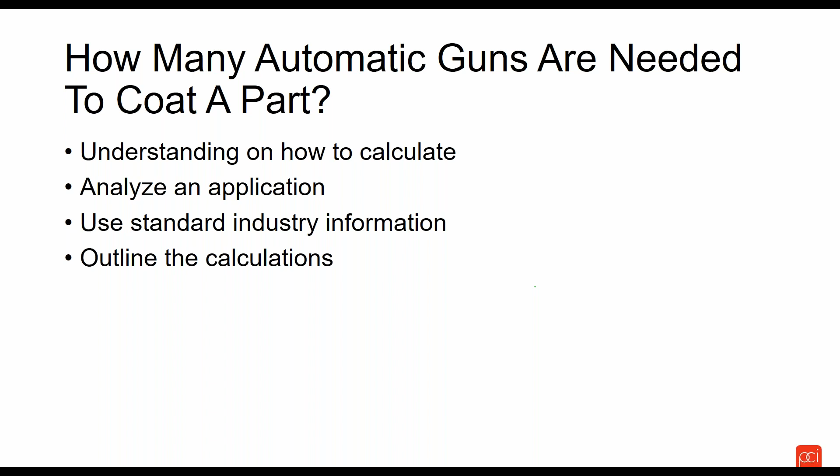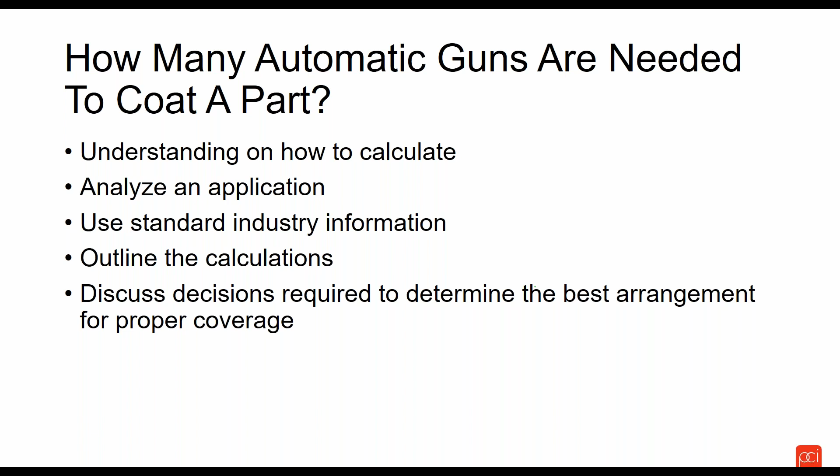We're going to use standard industry information that is available within our industry that all of us in the equipment business or in the powder coating business use from a standardization standpoint. We're going to outline the various calculations, and I'll point to some areas of where those calculations can be found in other publications for references. We're going to discuss some of the decisions required to determine the best arrangement for proper coverage. But all of that is really leading us to how do we calculate the number of automatic guns.

In this day and age where we have a lot of conversation about artificial intelligence, and supposedly artificial intelligence can determine so many things and make life easier, one of the things that I thought would be kind of interesting is, does today's AI really know how to calculate how many automatic guns are required to coat a part? What was interesting is I put the very question into ChatGPT: how many automatic guns does it take to powder coat a part? And I was kind of intrigued by the response.

Now, ChatGPT is more of a social artificial intelligence, so it doesn't really get into a lot of, at least from what I've been able to determine, a lot of the theoretical, real deep calculations. That's another level of AI that I think most people have to pay to subscribe to. But in this free version of artificial intelligence, I was pleased that it came up with the basic parameters that are required to calculate how many automatic guns are needed to be able to coat a part.

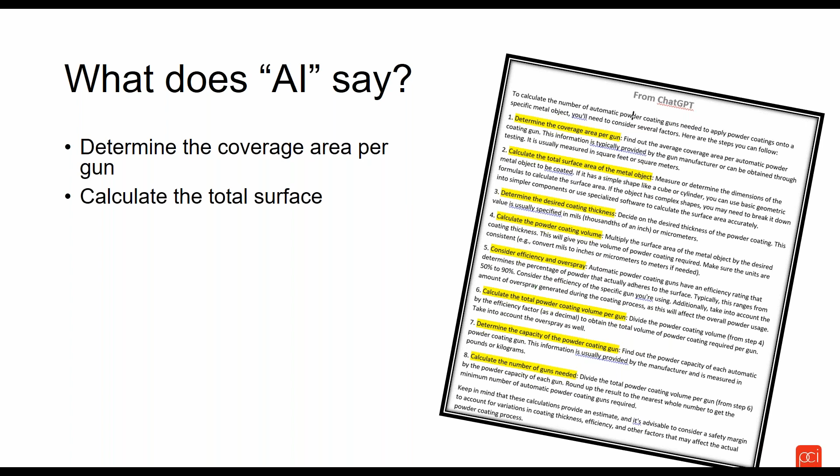I'll review some of those highlighted on the screen to the right. Determine the coverage area per gun - that seems pretty obvious. How much product are we having to cover? What are we trying to cover? What's that total surface area? How do we calculate that? It gives you some references in the general description there.

We also have to know how thick we want the coating. AI is at least smart enough to know that for us to determine how much powder we need to put on, we want to know how thick it really needs to be. What's our performance requirement is really what AI is asking us - what do you need to get a good quality product?

It knows that we're going to need to calculate, based on some of these previous bullet points, some volume of powder that has to be sprayed, or calculate the total volume to be used. It also knows that powder coating is not 100% efficient, so there is some inefficiency in the process and thus some overspray, which has to be factored into the calculation as well. Ultimately we're going to come up with a total volume per gun, and we're going to determine - or have provided to us - some capacity that our powder coating gun can actually produce. Out of that total volume divided by the gun capacity, we should be able to determine the number of guns. Even as generic as that description is on the screen, that is in fact how we are going to process how many automatic guns it takes to coat a part.

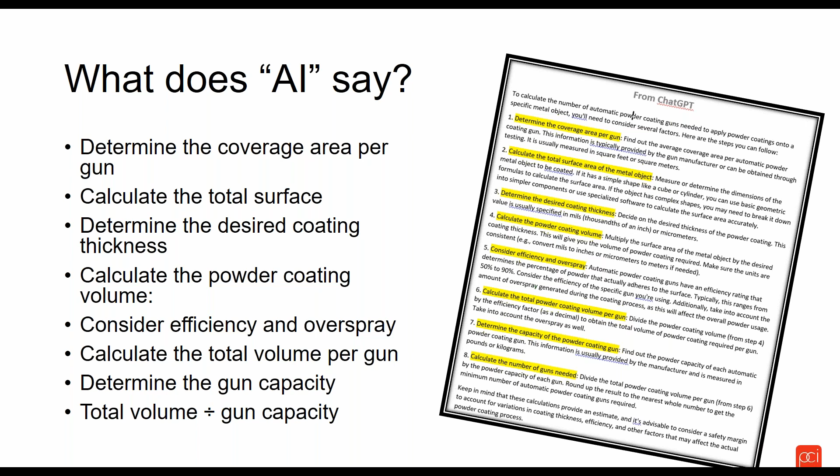So taking what is a general sense from artificial intelligence, let's go to a more industry known resource - the Powder Coating Institute. The presentation you have today is largely laid out in the Powder Coating Handbook, 5th edition, more specifically in chapter 10. If you're familiar with this book, or looking for a resource to refer to, I'd highly recommend obtaining a copy through PCI, the Powder Coating Handbook, 5th edition. Turn to chapter 10 and you'll see these formulas we're talking about, and the process of calculating the number of guns laid out in one of the sections.

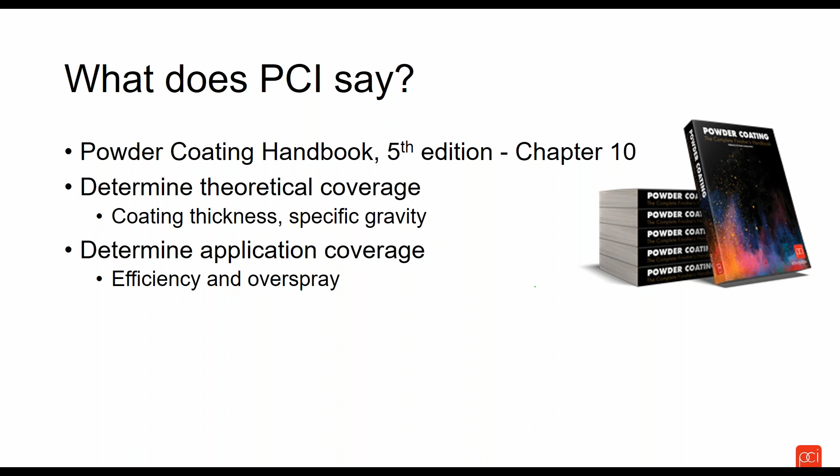In general, we're going to evaluate a theoretical coverage - determining what this theoretical coverage is that powder will cover. It's going to take into account the coating thickness and even specific gravity - we'll talk about that in a bit. We are then going to determine the application coverage, so we're going to factor in this efficiency and overspray mentioned in the AI example previously. We'll have to determine some sort of production rate - how much metal are we actually coating, and how fast do we need to coat this product? All of that is important for us to determine the correct number of automatic application equipment needed to properly powder coat a product.

We will need to know the capacity of a typical powder gun. Even in the 5th edition of the Powder Coating Handbook, we give a range that the industry uses, and that's a helpful guideline to follow as well. Ultimately, we're going to take our production rate and divide it by these other items we've calculated - application coverage and gun output - and all of that will be factored in to determine the number of guns required to powder coat a particular product.

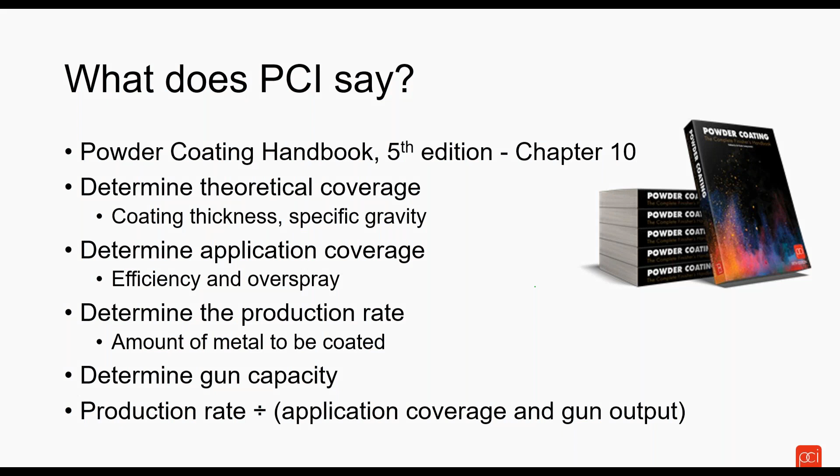PCI lays out all of these formulas in their book, so we thought we would take this webinar and put it into a more condensed presentation that would allow you to calculate this, if that was something you were desiring to do.

So let's dig a little bit deeper. Let's talk about some of these different areas. The first thing, as we mentioned, you need to know is the total production required. We're going to need to know the coating requirements - how thick does it need to be?

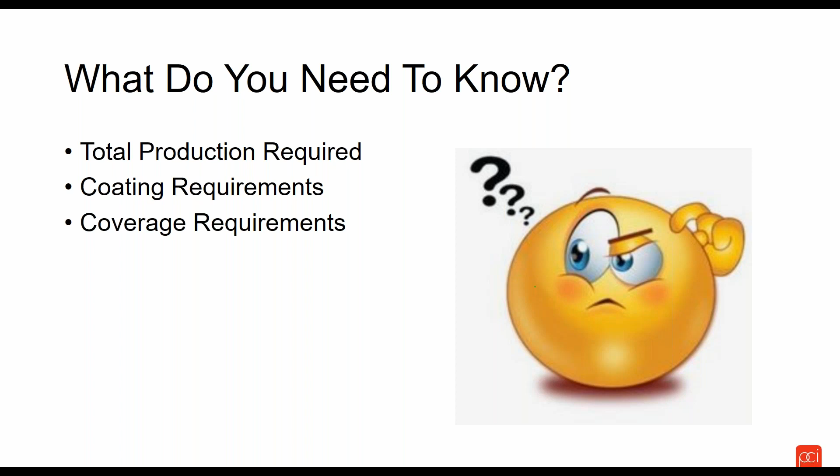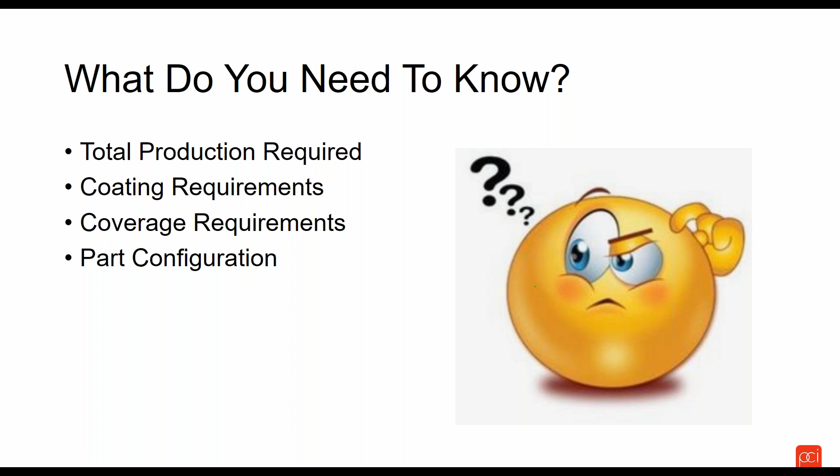There's a number of different aspects about the coating requirements. We'll review those shortly. We're going to need to know what is coverage, where are we looking for coverage, and what is the configuration of the part. We really need to understand what types of products we are coating. Let's look at these a little bit deeper one at a time.

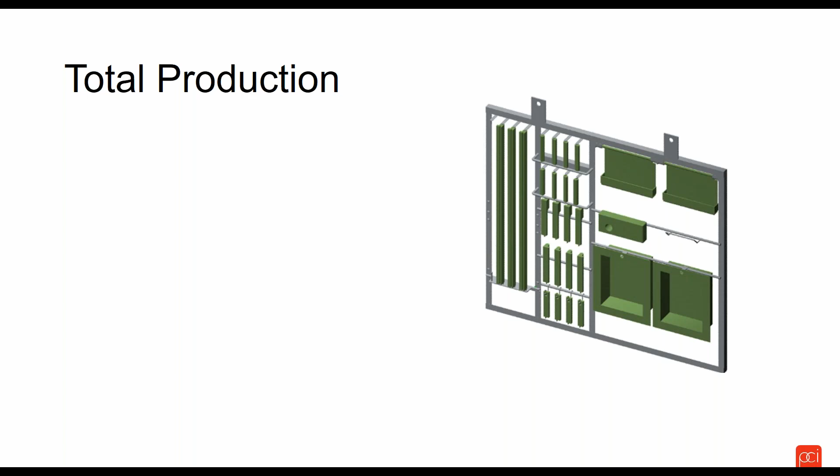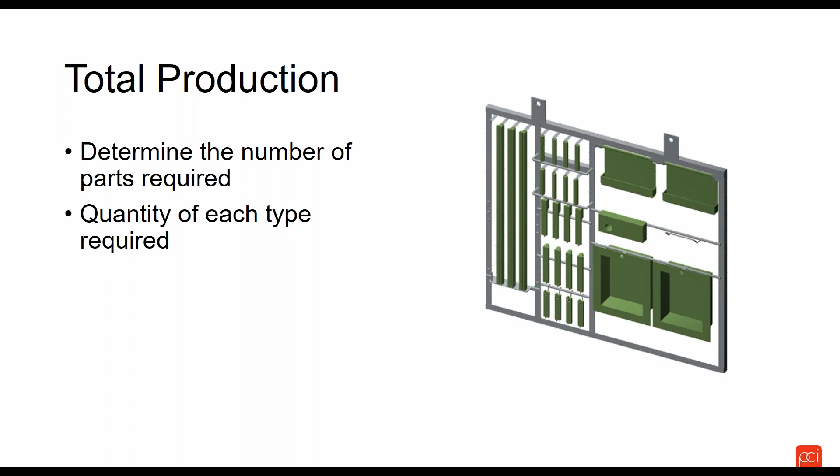That's certainly one way for us to look at how many automatic guns. You may have a particular need where you want to evaluate this for one specific component that maybe is hanging on the line, rather than a whole fixture. Whatever the arrangement of the product is, we do need to understand what are the number of parts required for us to process through this powder coating process line or booth where we have the automatic guns. We need to understand what it is we're coating, what's the number of them, what's the quantity required, to get a very good assessment.

What's the hanger and line spacing? If we understand each of these, we can begin to build a good hanging fixture or look at evaluating line density to improve that. Because line density and hanger spacing will help us improve our overall transfer efficiency. We'll discuss transfer efficiency a little later, but obviously the more dense the line with product, the more metal we coat, and the more efficient we can be in reducing overspray and recycling that material, or spraying to waste in some examples. But we want to be as efficient as possible. So maximizing our hanging, spacing, and line density is critical to getting the most out of whatever the number of guns are. But ultimately, we're going to determine some maximum part size.

That might be the maximum height. So let me use some of my drawing tools here. Give me just a second. We'll stay with the arrow. So I might look at my maximum part size from here to here. We're looking at this distance as my maximum part width, and likewise part height, and from here over to the right side, that would be along the conveyor. And if we had any depth, depth across the conveyor would be another way. But ultimately we're trying to determine what is the maximum product size that's going through.

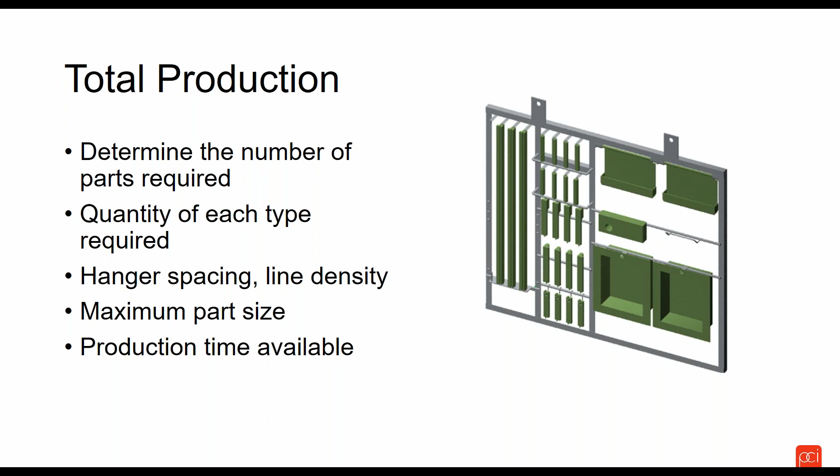What is our production time that's available? From that production time, we can ultimately determine some sort of production in terms of square footage per hour, per minute, per year. We can determine what is the amount of material that we need to process in a given period of time. That takes care of the production requirements.

From a coating requirement standpoint, we need to have a good understanding of how thick do we need it. Are there primary surfaces that we're concerned about where maybe the thickness is most critical, and where we want to ensure we achieve maybe 3 mils or we have a 4 mil target? And maybe there are some secondary surfaces, maybe on the backside or a hidden area where we're not as concerned with the thickness, but we are looking at the amount of powder that needs to be applied on these secondary surfaces. So understanding where the thicknesses are and coming up with some sort of overall average for the part is helpful. So coating thickness is important.

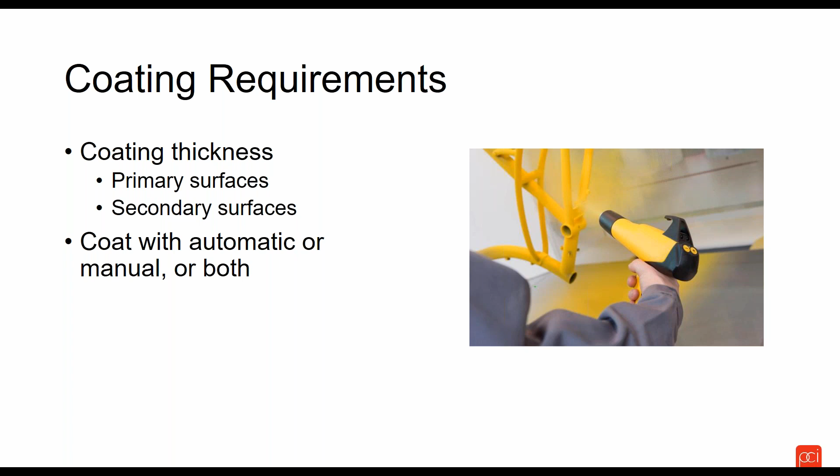Do we need to coat this automatically or manually, or will we be doing both? For the sake of our webinar, we're going to consider coating this automatically. However, depending upon the complexity or the geometry, there may be some surfaces that still require some touch-up to be able to get the required thickness or coverage we're looking for. Either doing that with manual, or even a secondary consideration of putting in some dedicated fixed applicators to target certain regions. But in general, what we're looking at in this particular case is what is the basic number of automatic guns required to coat the product passing down the conveyorized production line.

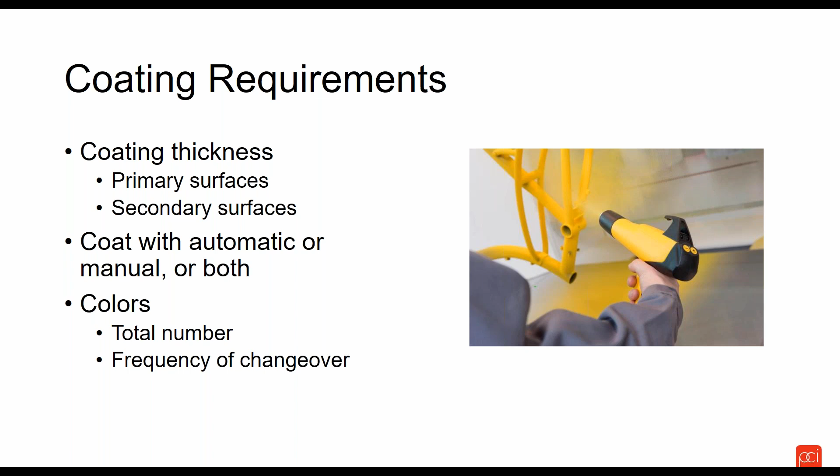We also may have a need to understand the total number of colors and/or frequency of changeover. That doesn't necessarily have as much to do with the number of guns, but it's important information from a coating requirement, just to have as an awareness if we're gathering data. From a coverage standpoint, how much has to be covered?

Is it based on the part style? Is there a particular rack or hanger arrangement we're concerned with? How are we hanging these? Where are the critical areas of concern? Are there areas requiring less or more coverage? What's the coating thickness? Those are all things in terms of understanding the coating and coverage requirements.

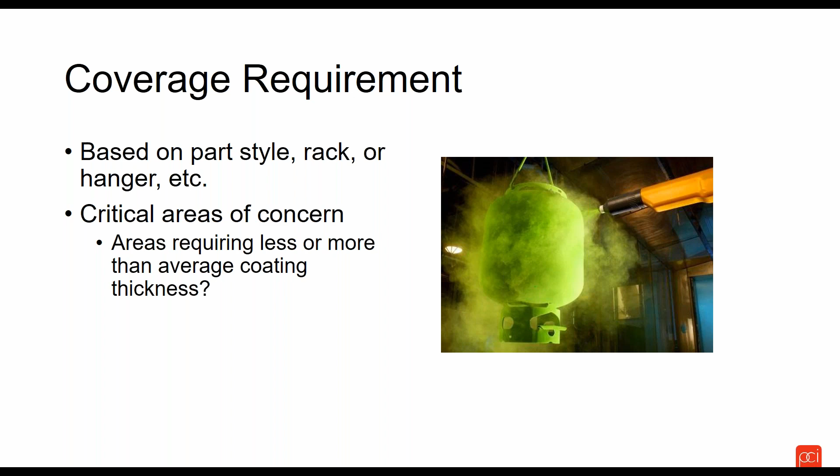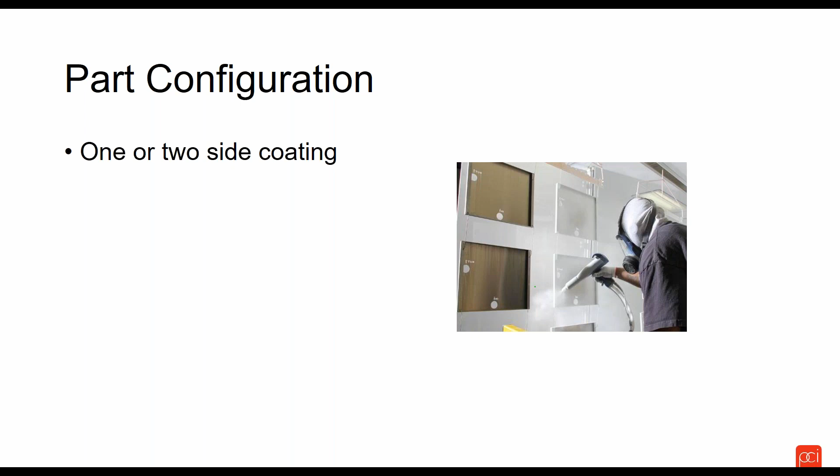Secondly is the configuration. Are we doing one-sided or two-sided coating? Are there areas we need to focus on for performance characteristics, corrosion protection, or is it just making sure some areas are covered even though they're not as critical from a decorative standpoint?

Will it be single hung or multiple parts hung back to back? We can improve efficiency by hanging multiple parts, but depending upon the arrangement, that can begin to mask certain areas. So we need to be aware of our hanging arrangement and part configuration. That's important in terms of an analysis.

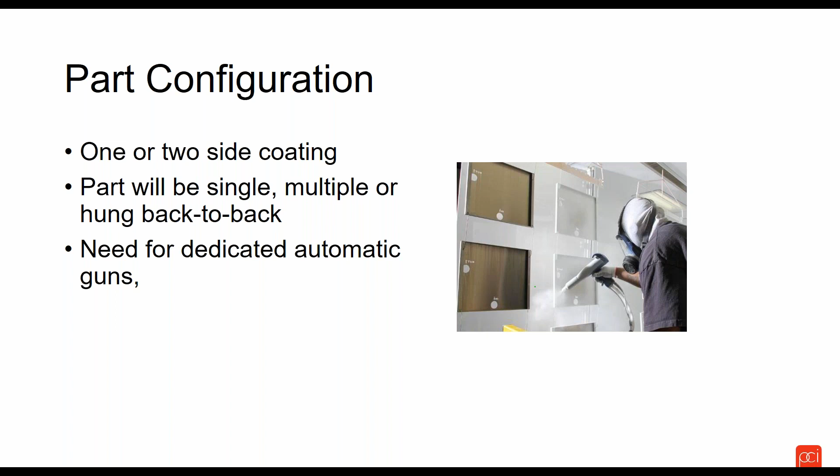And if there's potentially a need for either manual touch-up or some dedicated automatic guns for reducing manual labor that might be required. A lot of companies will typically put automatic guns in and then use some sort of manual touch-up, either pre or post, as a way to fill in areas that may need additional attention.

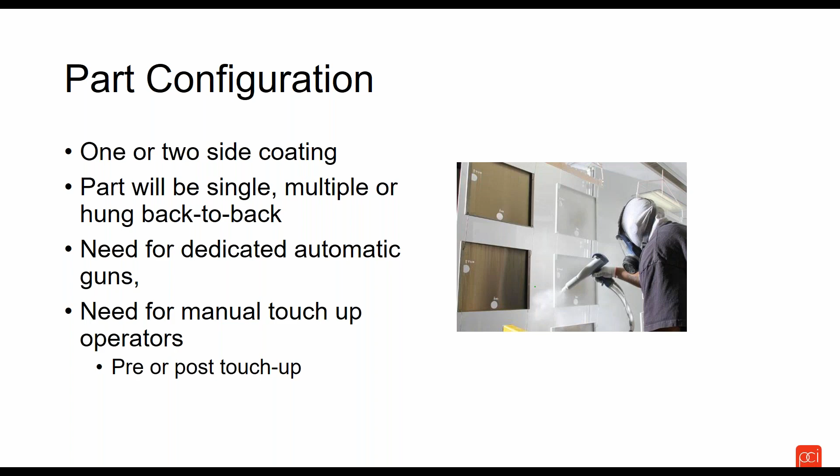So with all that being considered, if we have some good understanding of those four critical areas, we can begin to get a better understanding of how many guns are needed to coat a product.

I was kind of having fun with this. It's like answering the question, how much wood could a woodchuck chuck if a woodchuck could chuck wood? It's kind of like, how many powder guns does it take to coat this product? So in general, we're going to try and answer that question. Let's just dive right in and begin.

One of the first things we need to understand is what is theoretical coverage. We need to understand how far a pound of powder will go. It's kind of like, what's our average gasoline mileage per gallon for the car we drive? What's the theoretical mileage of that engine, right?

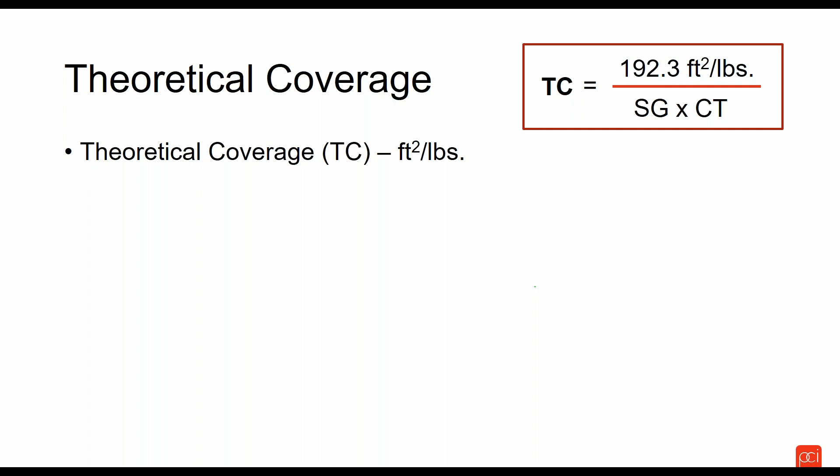In this particular case, we have a formula you see up in the corner. Theoretical coverage is the amount of square footage per pound of powder. How much metal can a pound of powder cover? One of the key things we want to do is factor in specific gravity.

But before I get into that, the question is, where does 192.3 come from? That is an industry universal powder constant. That is what the industry recognizes, that a pound of powder will cover 192.3 square feet, but that's based upon a specific gravity of 1, a coating thickness of 1, and an efficiency of 100%.

Now, those of you coming from the liquid side of the business may recognize that a gallon of paint will cover so many square feet of metal. It's a similar kind of constant we have in the powder coating world, and that's why I've highlighted it in red. That's our industry standard used throughout the industry.

Generally, all the powders you buy don't have a specific gravity of 1. They're generally heavier, or have a higher number. And the cured thickness is usually greater than 1, probably 2, 3, maybe 4 mils in some applications, or more. And obviously, as I mentioned, we're not 100% efficient, so we have to factor in efficiency at some point.

Our theoretical coverage is going to take into account the industry constant, and we're going to factor it down for the specific gravity. Where do I get that? The specific gravity is provided by the powder coating manufacturer, and it's usually found on their technical data sheet, the TDS. You'll find the typical range of powders for specific gravity is from 1.1 to 1.8.

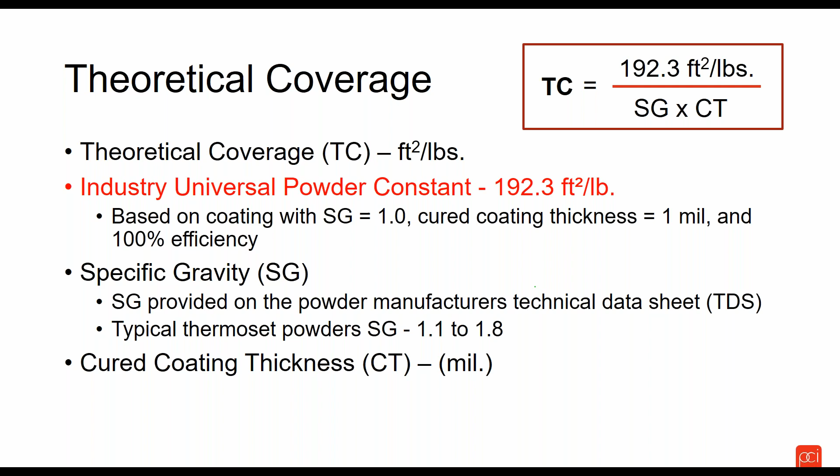But we do factor that into this, as well as the coating thickness. We'll come down to an example a little later where we'll see some of these, but in essence, this helps us understand what is the theoretical coverage of the particular powder you are evaluating in this scenario. And so then we factor in the efficiency.

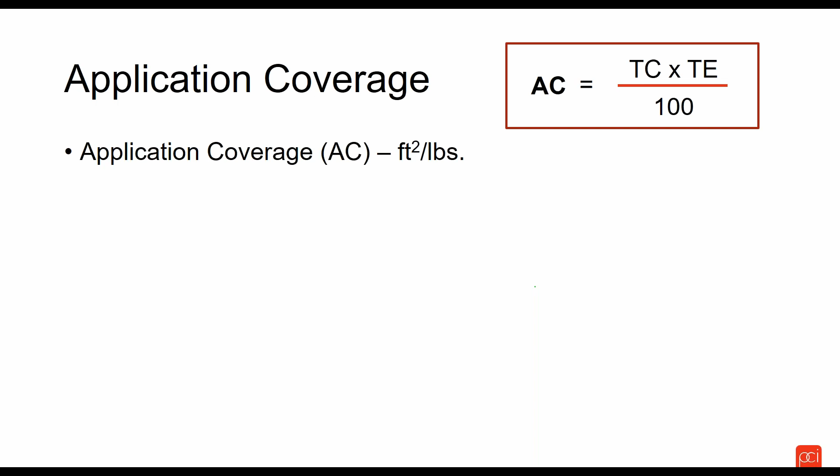Application coverage is the theoretical coverage, TC, factoring in the transfer efficiency. So application coverage again is square feet per pound, but really it's factoring the efficiency of the process. If you want to learn a little more about transfer efficiency, again I'd refer you back to the powder coating handbook.

There's also, although it's for a lab environment, it helps in the back of the powder coating handbook - I think it's Tech Brief number 10, on page 330. There's an example of how you can calculate transfer efficiency. That's based on a laboratory environment, but it does help you to better understand what's involved.

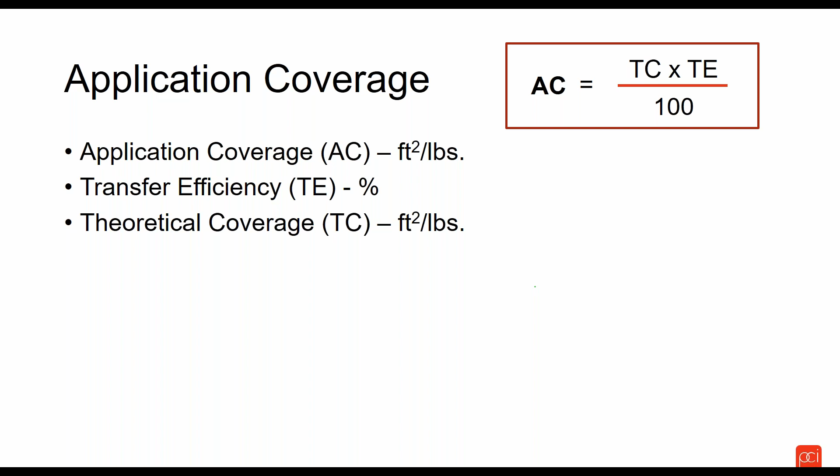Transfer efficiency is really nothing more than the amount of material applied to the product in a given period of time versus the amount of powder that was sprayed in that same period of time. So the more we apply to the product, the more efficient the process is. Theoretical coverage is again the previous formula we calculated, and this helps us understand how these two dovetail together. So let's keep going.

We now have a better understanding of how much a pound of powder will cover, so we also need to look at our production rate. Our production rate is basically the amount of square footage of material we plan to process on this conveyor line, generally thought about in terms of square feet per hour or square feet per minute. In this particular example, it would be square feet per hour.

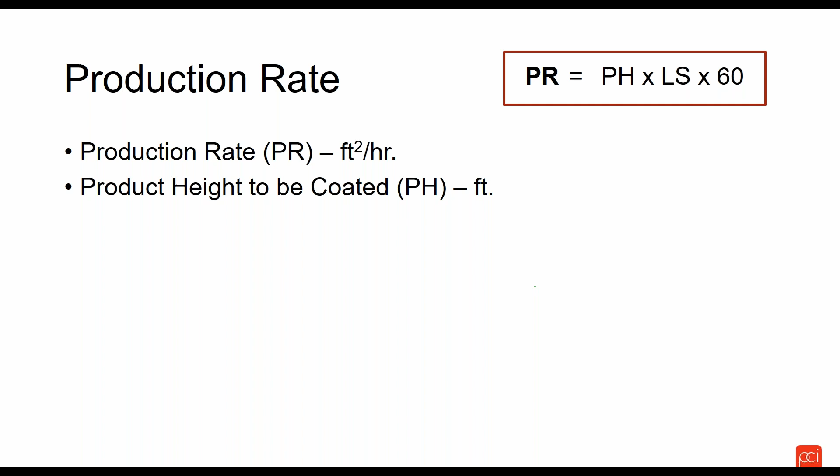The product height to be coated is the maximum height of the product going through our conveyorized line - how many feet high is this. Our production rate takes into account the line speed of the conveyor, and in this case we will take the product height times the line speed.

We've really simplified our square foot calculation, because automatic guns spraying in a booth are looking at a wall of product coming by at a particular speed - that's our conveyor speed. So it's a simple calculation: product height times the line speed, and the 60 is our unit conversion to make the hours and minutes work out.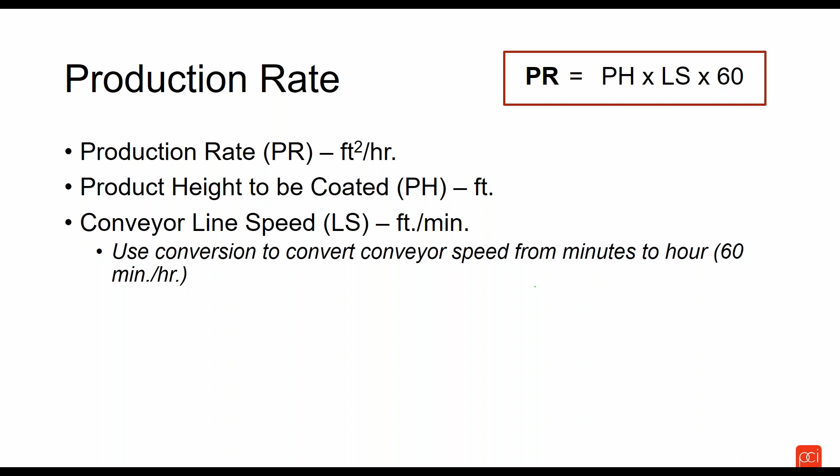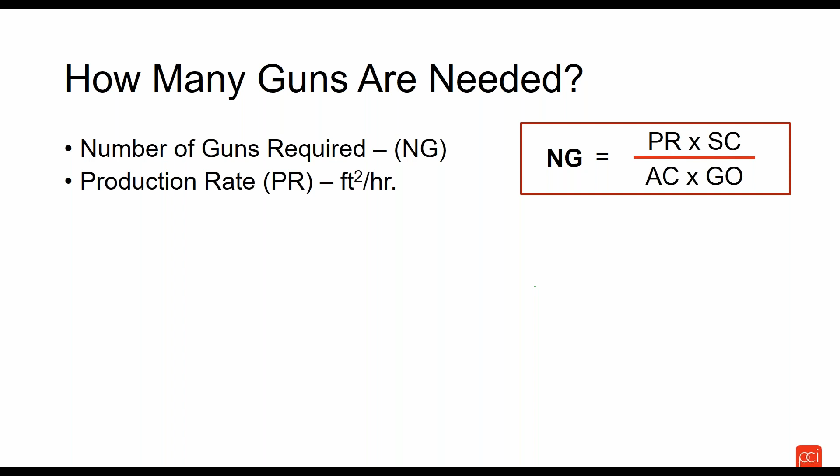Our production rate then would be a number that we use. So the question is, how many guns are needed? The number of guns we'd use in our calculations would be NG, the number of guns required. To do that, we're going to take the formula you see on the right side of your screen.

We're going to look at the production rate in square feet per hour, and the application coverage, which is our overall applied efficiency in square feet per pound. We'll factor in the number of sides coated - whether we want to evaluate application from only one side of the part, or look at it as a total, considering both sides of the product.

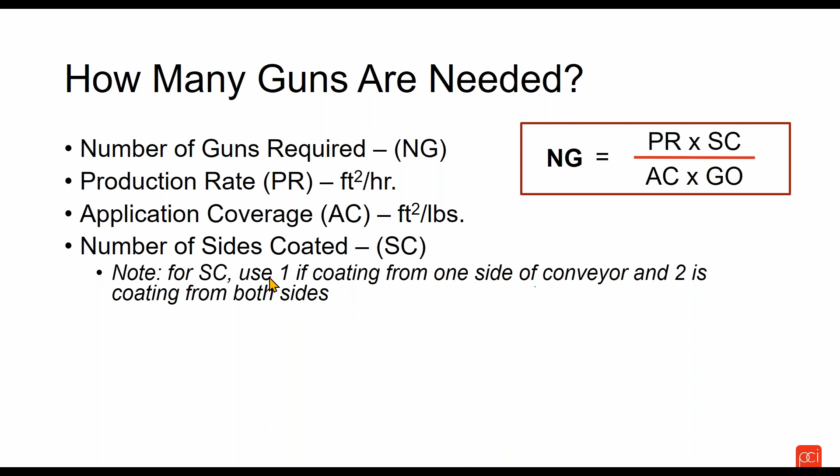So it does make a difference which number you use, but you're only going to use 1 or 2 - one side or two sides coating in the SC category here. And then we're also going to put in the amount of powder that we think is coming out of our guns. Now, this can actually be measured.

If you're looking for information about how to do that, I would talk with your equipment supplier. That's a very simple and easy way to calculate the amount of material that is coming out of your spray gun per minute or per hour, however you choose to evaluate that.

In the powder coating handbook, we give you a working range that typically is between 19 to 29 pounds per hour. For those of you working in metric, that would be a range of roughly 145 grams per minute to 220 grams a minute. So depending upon what type of units you like to work with, those are the typical ranges that most manufacturers are trying to drive or use their equipment in.

And I'll say this as an example: this does not mean that the maximum amount of powder that can come out of a powder gun is 29 pounds per hour or 220 grams per minute. That's saying this is our ideal range to work in. Typically, like you would drive your car, you never want to drive your car with the accelerator all the way to the floor, because you would wear out your engine, you use more gas, you use more oil.

Likewise, we would never want to drive a car barely touching the accelerator, because we'd get honked at all the time - we would never get anywhere. So we have to have an ideal range to work in, and that's really what this is trying to give you an example of. This is a pretty good range that most of the manufacturers are designing their system around.

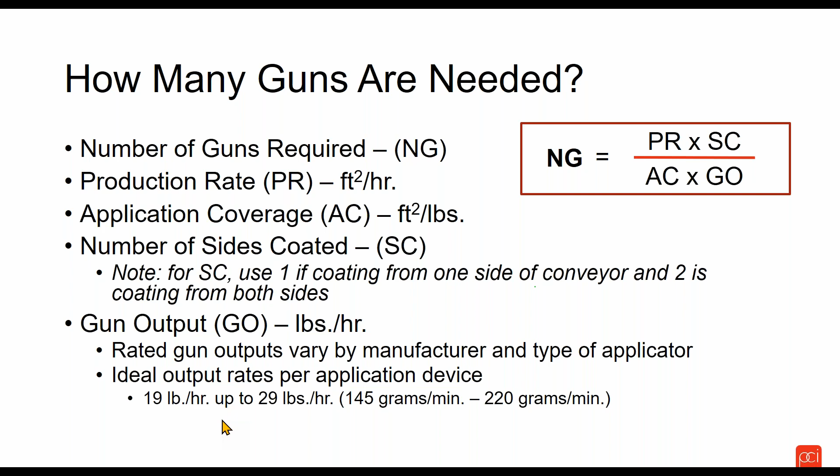As we typically say, more is not better in powder coating. We can be more efficient with less powder coming out of the guns, but finding that sweet spot, that operating spot, is really critical.

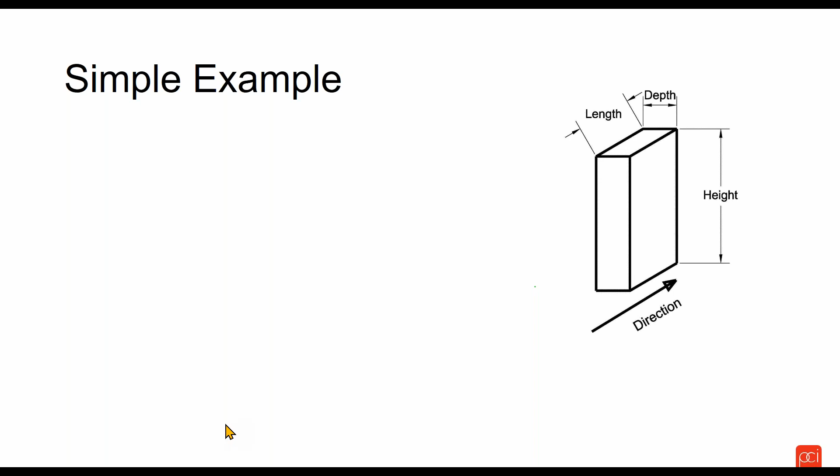So now that we have a basic understanding of the formulas, let's walk through some of these formulas in an example. So we have a product that has a particular conveyorized direction - we have a length, a width, and a height. In this case, we're going to run our line speed at 15 feet a minute.

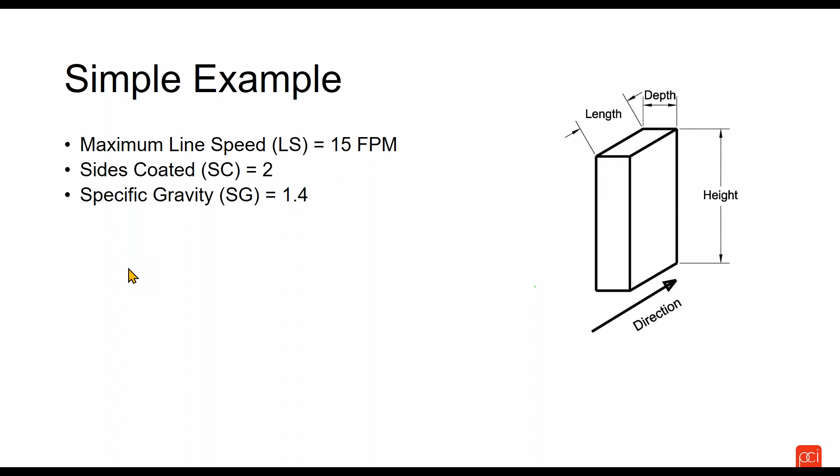We're going to evaluate the application, we're going to evaluate the total number of guns that are required. So we're going to use a sides coated of 2 - that means both sides will be calculated in this example. We're going to come up with a specific gravity of 1.4, which I would call the nominal or average range specific gravity of powder that you would find in the industry.

We're going to use a coating thickness - in this particular example, it's going to be pretty low, 1.25 mil, which is a very low film thickness.

But for this particular part, we're going to have a product height of 5 feet, a length along the conveyor of 3 feet or 36 inches, and a width across the conveyor of 1 foot. And I see it says width here on my screen, but on the little example that would be depth - sometimes width and depth can be interchanged depending upon your perspective. But in this case, the 1 foot would be the width across the conveyor or the depth across the conveyor, either way.

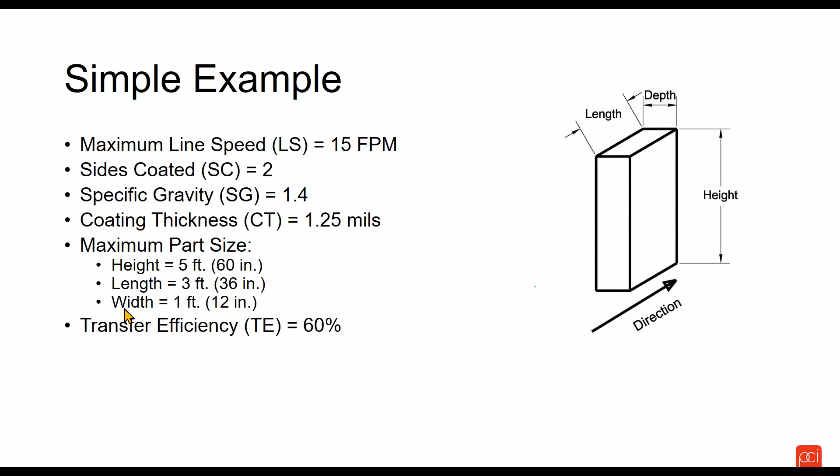Our transfer efficiency, we will assume is moderately efficient, so it's a 60% TE. And our gun output we will put at a range of about 26 pounds per hour, so we're still within that window that we would like to operate.

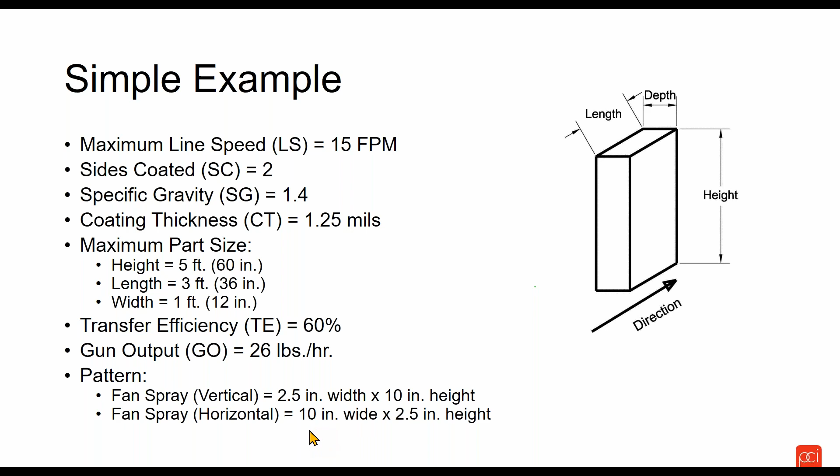So it's important for us to understand the pattern, approximate size of the pattern. And we'll walk through these examples here as we go through.

So our theoretical coverage is, again, using our formula that we reviewed earlier. We'll put in the numbers of 1.4 and 1.25, and we can see that our theoretical coverage is 110 square feet per pound.

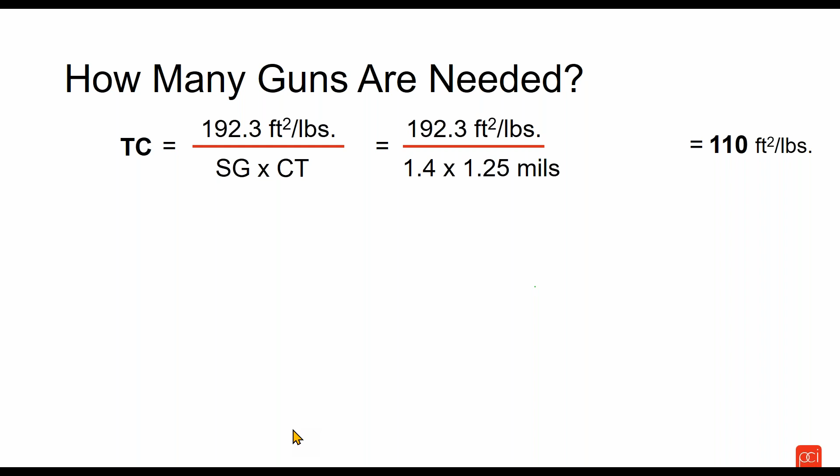Likewise, we want to factor for efficiency. So our theoretical coverage is 110, as we just calculated, but we're going to use the transfer efficiency to show that we are not as efficient as we would like to be. So that theoretical coverage is factored down - we can't cover as much because we're not 100% efficient, we're only 60% efficient. So in this case, our actual application coverage, a pound of powder will only cover 66 square feet.

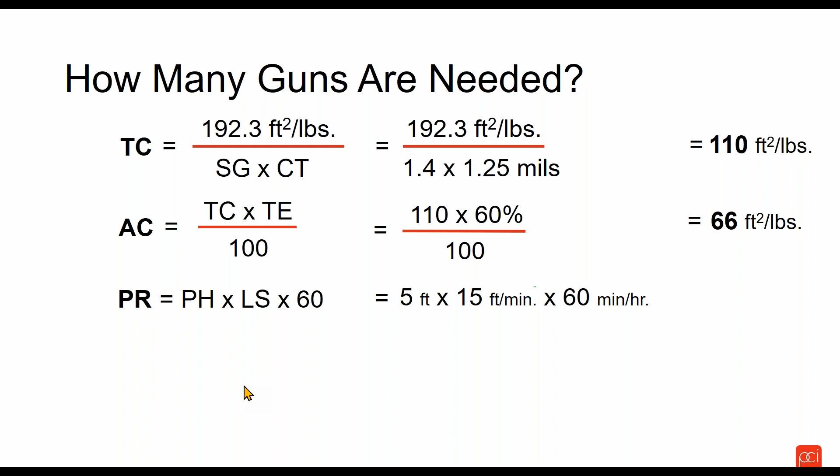Our production rate is taking our line speed and our part height, maximum part height of 5 feet, and we're putting that into our calculation, and we can determine that there's 4,500 square feet in an hour that our production rate is producing.

So to determine the number of guns, we're going to take our production rate of 4,500. We already determined that we were using 2 sides coated, and we just calculated our application coverage, that's 66 square feet per pound, and our gun output we established in the previous slide of 26 pounds per hour. All of that tells us, we work through the math, that in this particular example, 6 guns are needed.

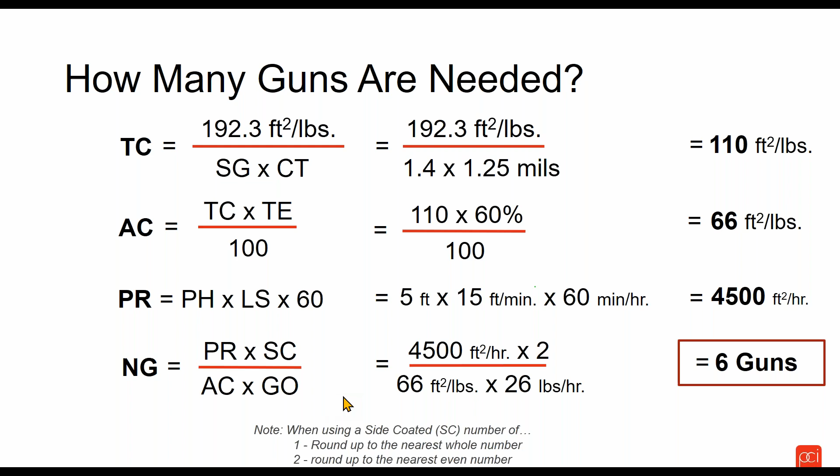Now, in this particular case, we utilized the sides coated of 2. So the 6 represents a total number of guns needed to coat the product. And in this case, 6 guns, or 3 per side, would be used in our conveyorized application.

So the question is, we need to do a little bit of an analysis. Number 1, is this enough guns? Could I be utilizing fixed guns, or is there an alternate way?

If I'm going to be using fixed guns, what's the spacing of the guns? And if I'm going to be using perhaps maybe even a gun mover, what does that look like? What is the stroke and speed that's required? What type of gun tip is used is another piece of this that we need to at least factor into our analysis.

So now we know that 6 guns is required to spray enough powder to cover at our particular coverage rate, but we need to do a little bit of an application analysis to make sure that that is enough guns. So let's walk through a couple things.

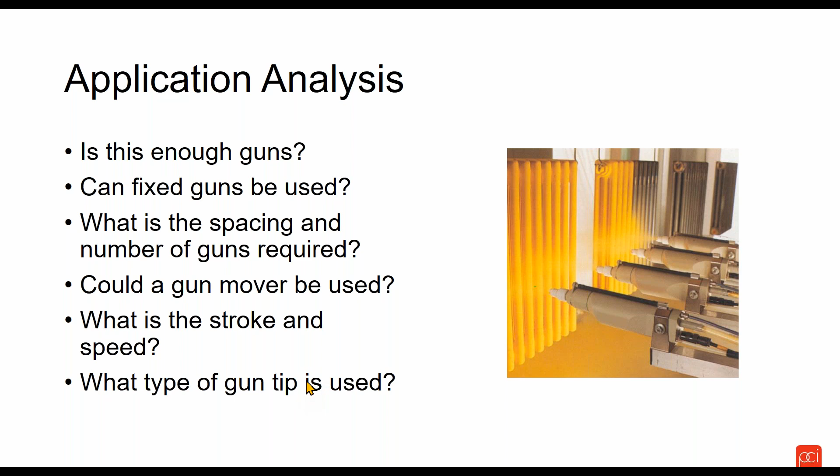Number 1, it helps us to understand what's our spray size. So really, to do a proper evaluation, we need to understand what type of tip we are using and what is its effective height and width that is generated from the gun.

I'll liken this to, if I gave you a wall to paint in your house, and I said, here's a gallon of paint, cover the wall, and you have a limited time to do it, you would likely want to use the widest brush possible. It would be a lot faster with a 6-inch paintbrush as opposed to a 3-inch paintbrush or even a 1-inch paintbrush. As you can imagine, each of those brushes generates a certain width or effective pattern as we stroke the brush along the wall.

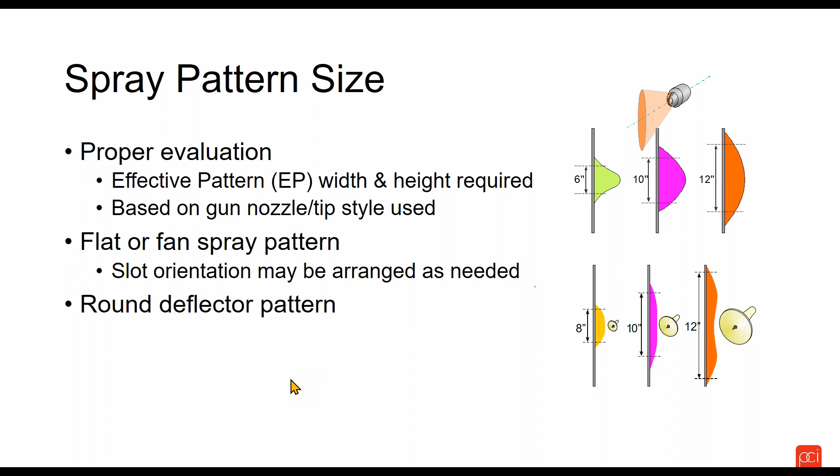And a powder gun is really no different. It's based on the type of tip that's used. Understanding whether to use a flat spray or a deflector, either one, there's certainly a whole other conversation to have as to the advantage of each of those, but you do need to have a relative sense of how wide and how tall the pattern is that is generated from the spray gun, regardless of the type of tip you're using.

We also need to understand the maximum part height. Do we need to spray above the product, below the product? What if they don't even need to go over the product? So we need to think through what is required, how deep or wide the product is, and how do we evaluate this?

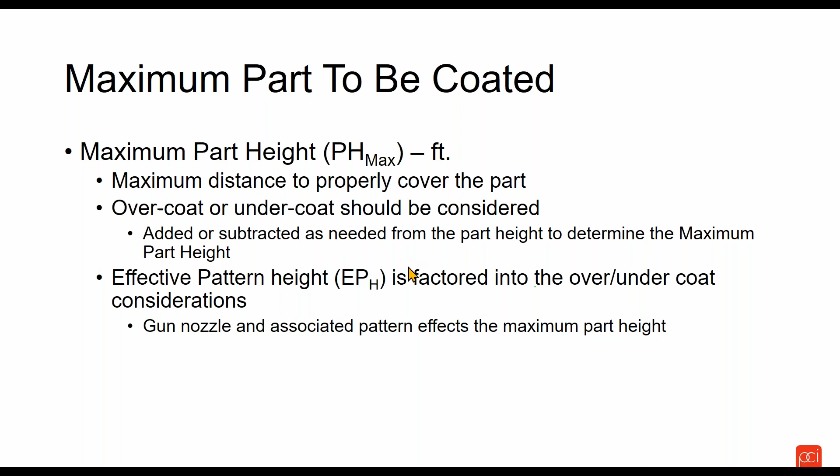So this effective pattern height is important. That's our EP with a sub note of H there - that's our effective pattern height. And our maximum part height, max, those are going to be used to help us determine whether or not we have the right application.

So let's walk through an example to understand this more. In this case, we're utilizing a flat spray where we are vertically orienting the nozzle. Vertically means the 10-inch height of the pattern, as well as the 2.5-inch width of the pattern.

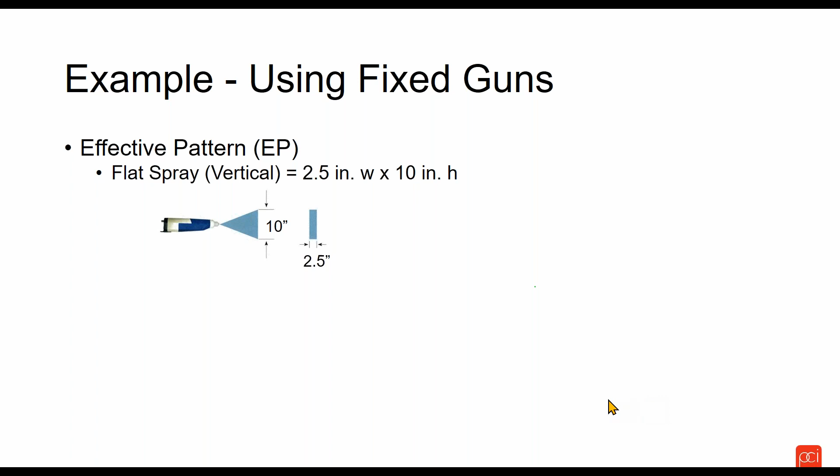In this particular case, we would want to have extra coating above the product because there's a certain amount of depth. Let's say we want the full 10-inch pattern to go above the product as well as below the product. We've determined through our analysis that's what's required to coat the product, so we need to factor that into our overall part height.

So in this case, we're going to what we call overcoat, or overstroke - that's more related to reciprocation, but we're going to overcoat the product both above and below. The maximum height in this case is our 5-foot product plus the 2 10-inch patterns, which makes the overall maximum part height 80 inches. So our part grew in height because we want the spray guns to cover this.

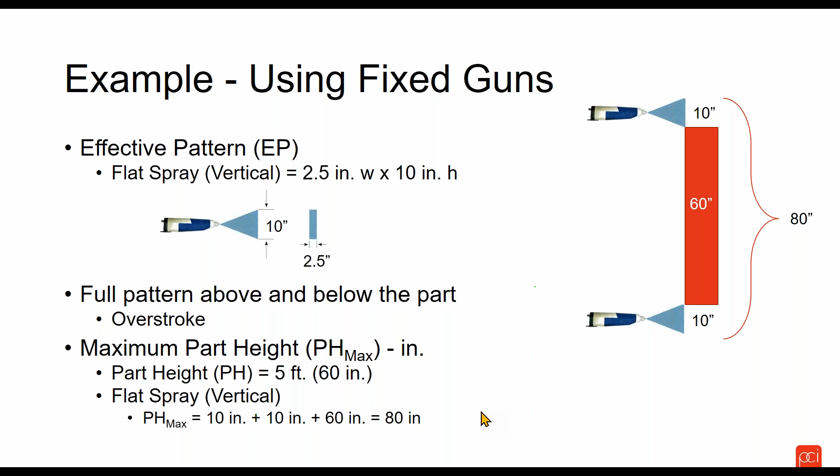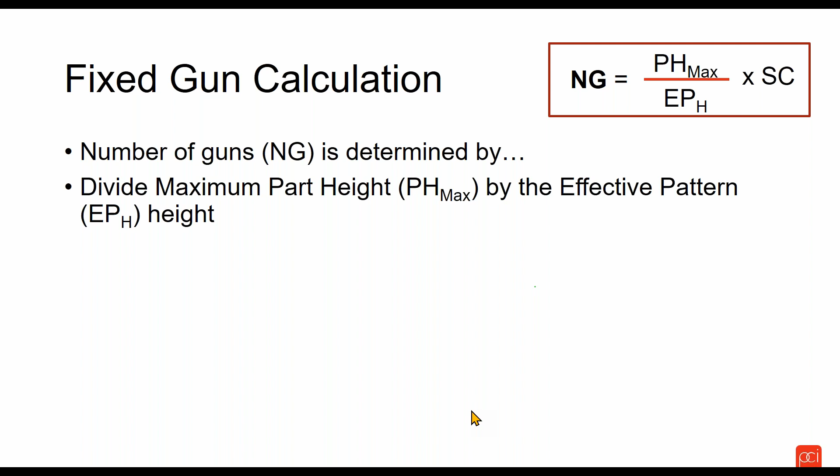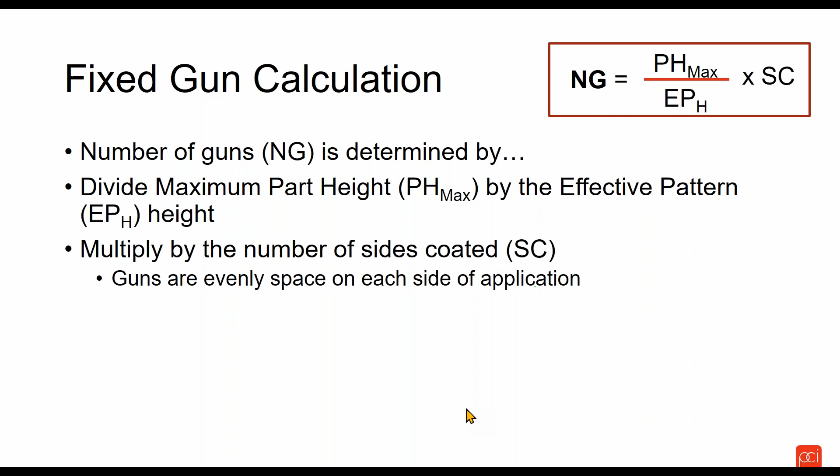So in this particular case, our fixed gun application would be as follows. The number of guns is determined by taking our maximum part height, dividing it by our effective pattern height, and we're also evaluating whether we want to look at per side or total application - that's the sides coated. So our fixed gun example would be maximum part height, and we have the 80 inches we looked at previously divided by our 10-inch high pattern height.

So 10 inches into the 80, times the 2 sides coated, means in this application to have a gun every 10 inches so that the patterns overlap or uniformly blend together. I would need 16 guns to coat this same product if I wanted to arrange them in this configuration.

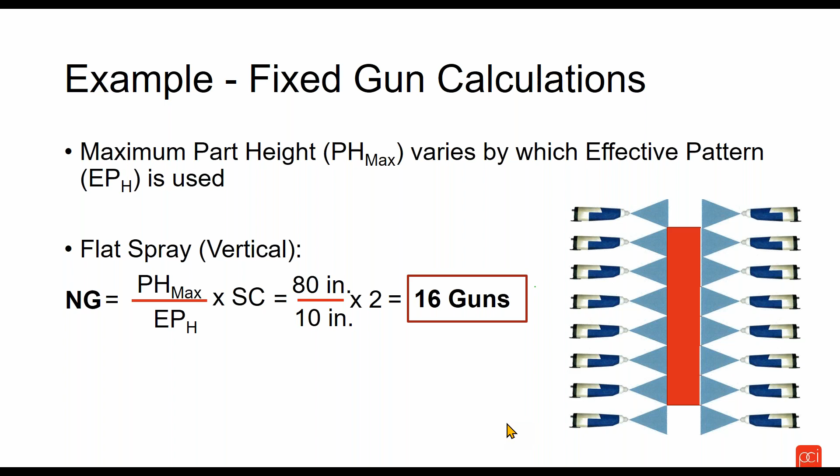So you might say, well, that's a different number than what we calculated before. Let's do a quick review. The 6 guns we calculated a moment ago was based on coverage capability for how much a pound of powder can cover given the thickness, the specific gravity, and the efficiency. So we can spray enough powder out of 6 guns to coat the product, but we also determined that to arrange those 6 guns stacking vertically every 10 inches, we needed to add more guns to use fixed guns.

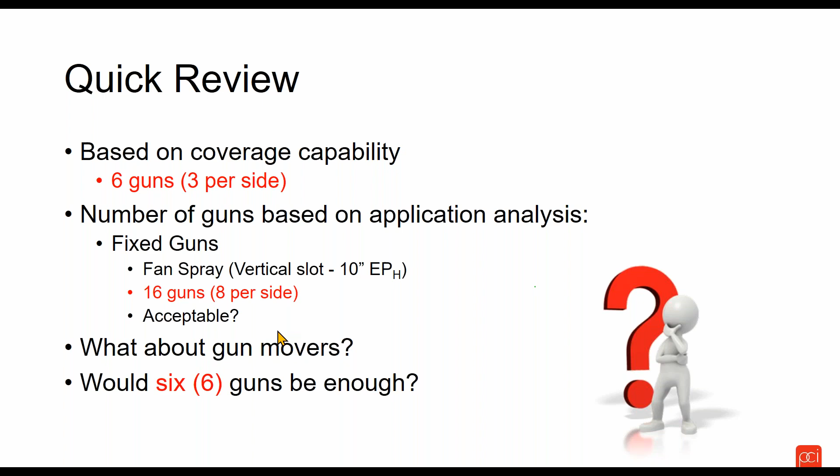So is this acceptable? Maybe, maybe not. If you're in a situation where you already have 6 guns, you would need to buy more guns or come up with an alternative method. An alternative method could be utilizing gun movers. Let's take a look - would utilizing 6 guns with gun movers be an alternative solution for this particular application?

Let's make sure we understand some of the considerations for a gun mover. Typically, a gun mover will use less guns than a fixed arrangement, because we're basically moving the gun across the surface, so we're able to cover more area as the product passes by. The gun, as you see from the animation, is stroking up and down, so everything is perpendicular to the conveyor.

You'll hear terms of short stroking - that's generally what the industry refers to as a 6 to 24-inch short stroke dimension. In other words, the gun is moving 6 inches up or down to a maximum of 24. Once you get above 24, the industry looks at that more as a long stroke application, but it doesn't really matter whether it's long or short - you're calculating an arrangement of guns in some configuration where they're moving on the product.

Ideally, we want to have the gun mover stay within the speed limits of the machine. Generally, as referenced in the powder coating handbook, the maximum is 100 feet a minute. We want to move it as slow as reasonably possible, but most of these machines do have a speed range that they work ideally in, just like our gun output.

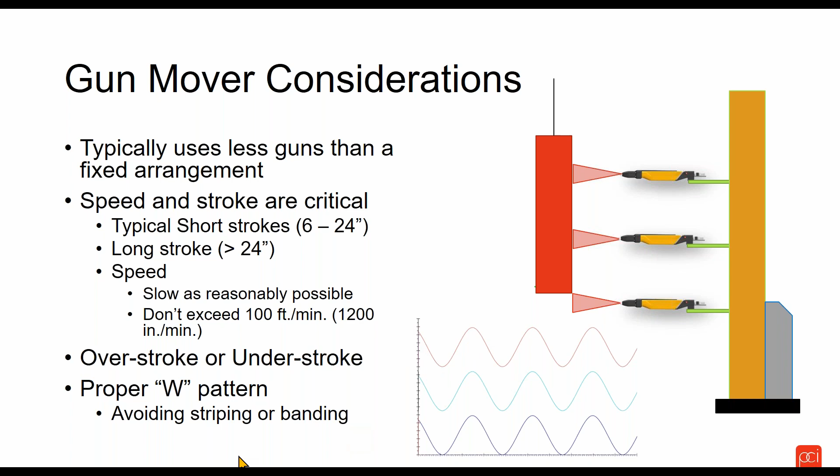Ultimately, we're going to come up with a W pattern, and that's because the gun is moving up and down as the product is moving across along the conveyor line. That creates this W pattern. Much like you can get with a fixed arrangement, if the guns are not arranged so the patterns are overlapping correctly, you would see striping, heavy bands or light bands. You can still see light bands and heavy bands, but instead of it being a horizontal line across the product, you see it more as the shape of a W. That's where we talk about optimal gun movement, which is basically getting the speed of the conveyor in concert with the machine.

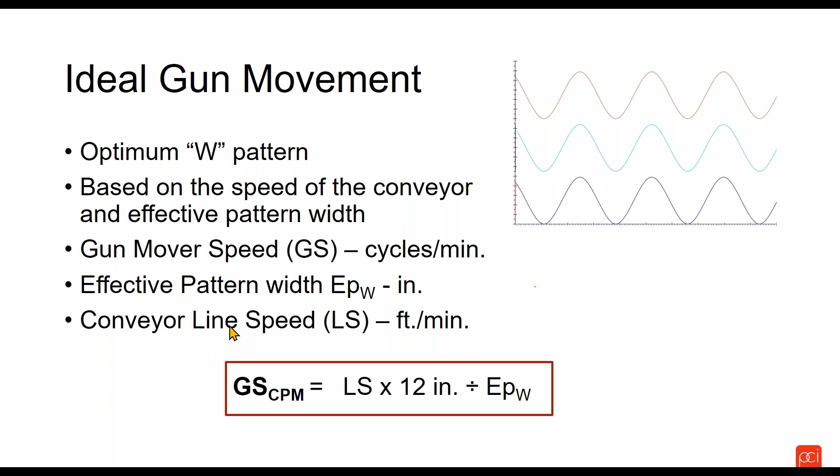So we have to take into account the effective pattern width to be able to do that. Gun mover speed is known as cycles per minute, and the effective pattern width, as we've already established, is in inches. Our conveyor speed we would know in feet per minute. So we're going to look at a formula that takes into account all of those. The cycles per minute, or the speed at which the unit is moving, is the line speed times a units conversion divided by the effective pattern width.

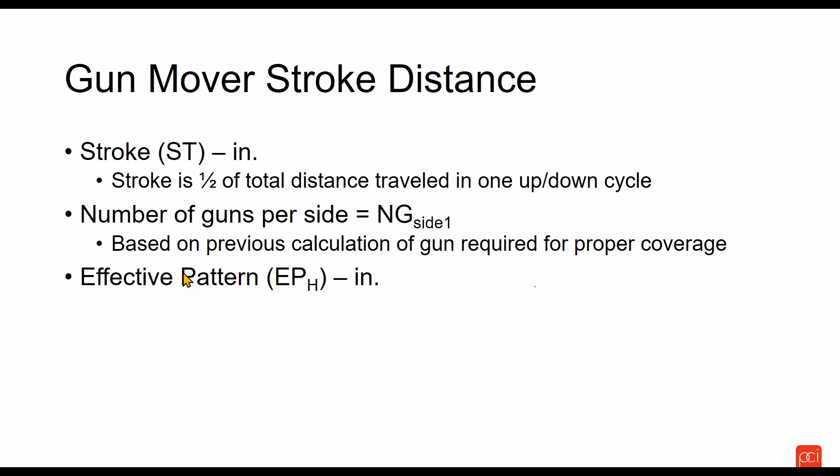So our stroke, in this case, is how far does it travel? In other words, stroke is generally half of a complete cycle. We go up and we go down, that's a cycle. The stroke is really half of that. The number of guns per side we've established through a couple of these different formulas, basically whether we're looking at one side or two sides. In this case, we're going to evaluate this from a one side application, and we need to understand the effective pattern height. We'll walk through an example here in a minute, but our stroke is basically calculated by looking at the maximum part height minus the total effective patterns, times the number of guns that we have.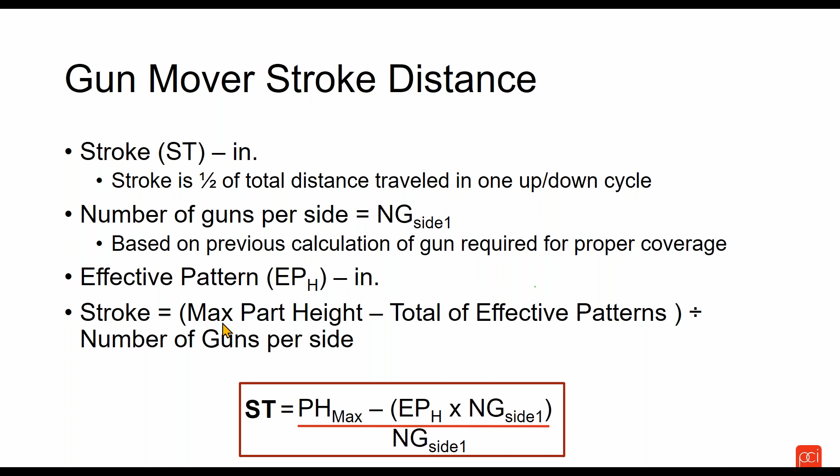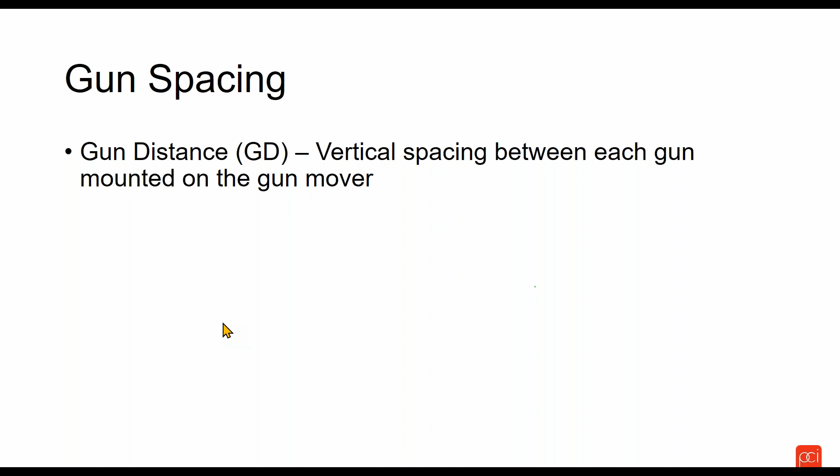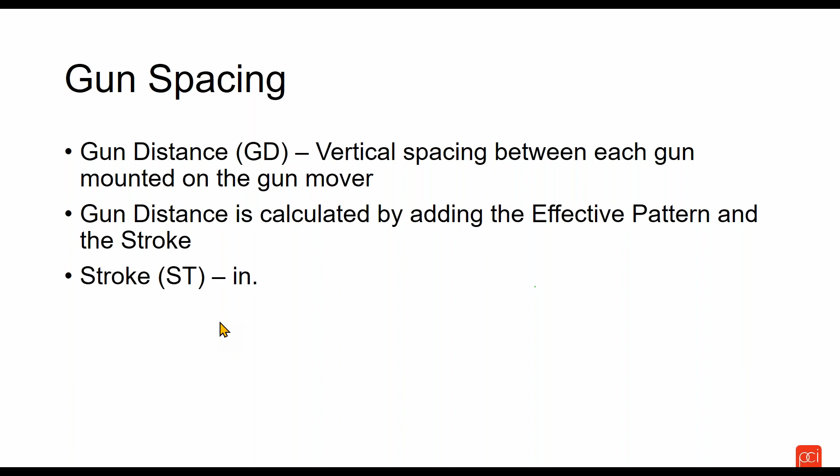Let's walk through a little bit of an example where we can see how this is utilized. I have one more formula to review. Gun distance is the vertical spacing between each of the guns on the gun mover. So we need to know how fast does the machine move, what's the spacing of the guns, and how far is the gun moving. The gun distance is calculated by looking at the stroke and adding the effective pattern. I'll walk you through an example so you can see this with a little bit more clarity. Here is our gun distance: as I mentioned, it's stroke plus the effective pattern height.

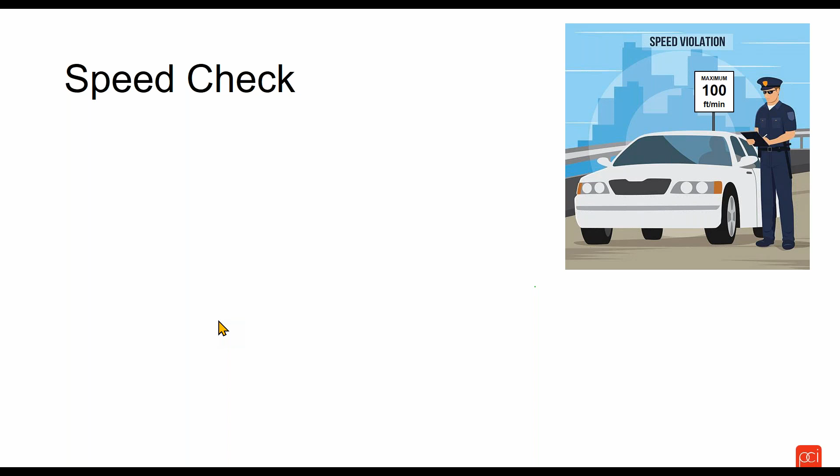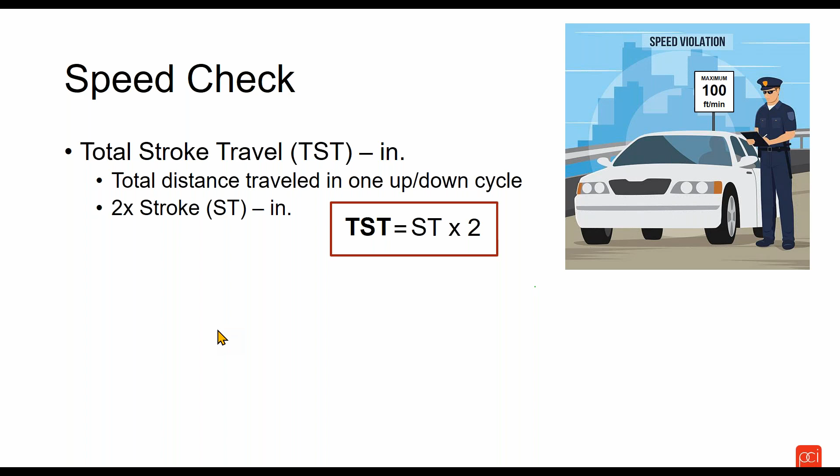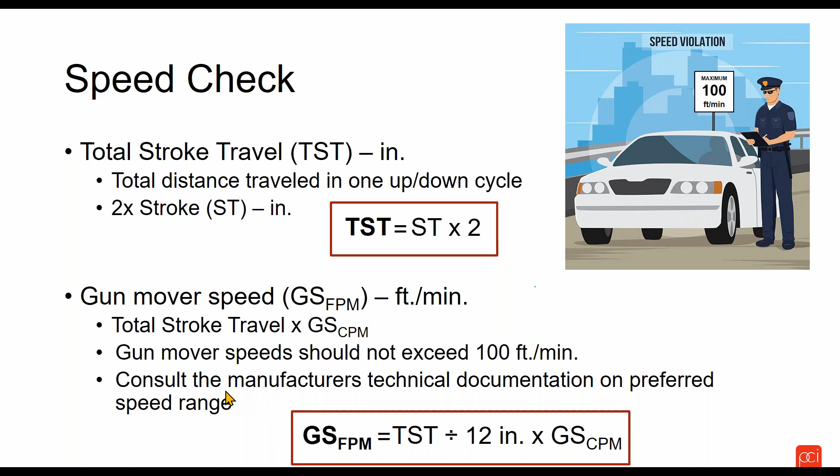As I mentioned, we also need to have a speed check. Just like you do in your car, we want to make sure that we speed check our application. In this case, our total stroke is basically looking at the stroke times 2, and we put it through a formula where we're going to calculate the total stroke. We're basically checking to make sure that the gun does not exceed 100 feet per minute. I would always encourage you to consult with the manufacturer of the gun mover to make sure that you're operating within the parameters of their speed requirements. But in general, this is how you would calculate gun speed in feet per minute, knowing the variables that we've established already. So let's look at an example here.

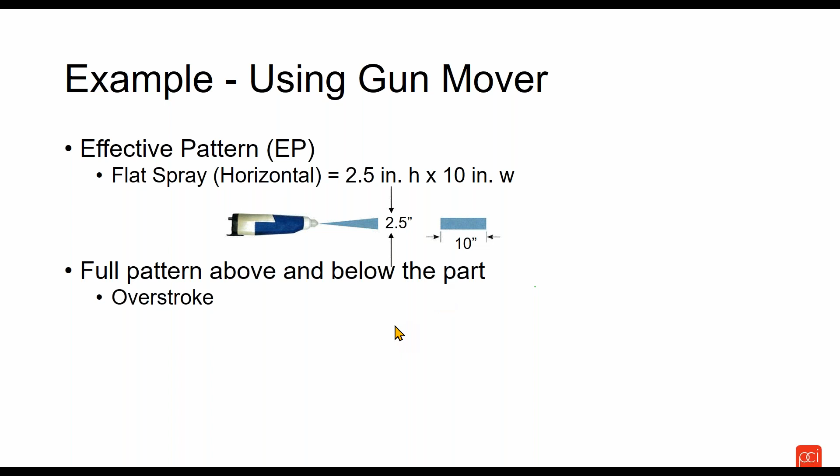In this case, we're going to be turning the pattern horizontally to get the most effective use out of it. So our pattern height changed from our previous example. Now we are doing horizontal, so it's 2.5 inches high and 10 inches wide. In this case, we're going to overstroke the part just like we did in the previous example. Instead of going 10 inches, our pattern is only 2.5 inches high.

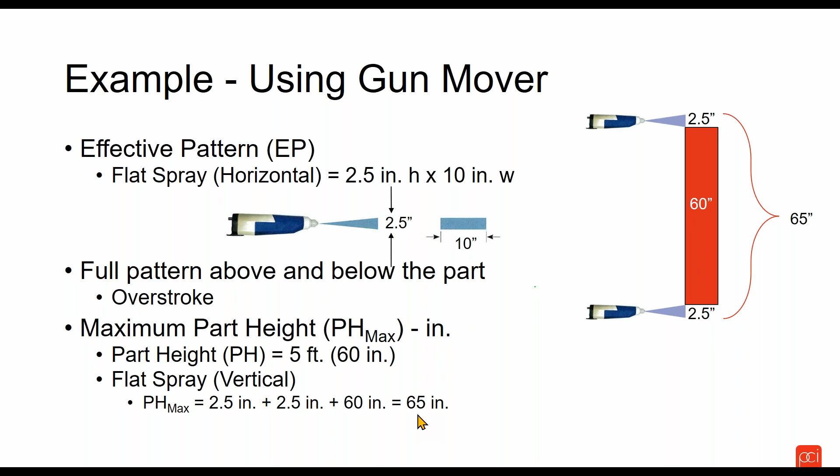Now, as we go through utilizing our gun mover, with 65 inches, we're looking for what is the stroke of the machine. As our formula is laid out, we take the 2.5 inch height of the product times the number of guns on the side. That's the amount of pattern that we're going to take away from our maximum part height. Those guns are covering that much of the product.

And then we're going to divide the residual of that by 3. That tells us that our gun needs to move 19 inches. So our stroke in this example means that the guns are going to be stroking 19 inches.

Our gun distance in this case would be, in other words, the distance between the guns. That would be adding in our 2.5-inch dimension, so our gun distance is 21.5 inches. So we're stroking 19, but the distance between the guns is 21.5 inches.

Our cycles per minute is looking at how many cycles in the course of a minute. In this case, it's our line speed times our unit conversion divided by the effective pattern. So our ideal speed of the machine would be 18 cycles per minute. And that is the 3 numbers that we would need to be able to position our gun mover.

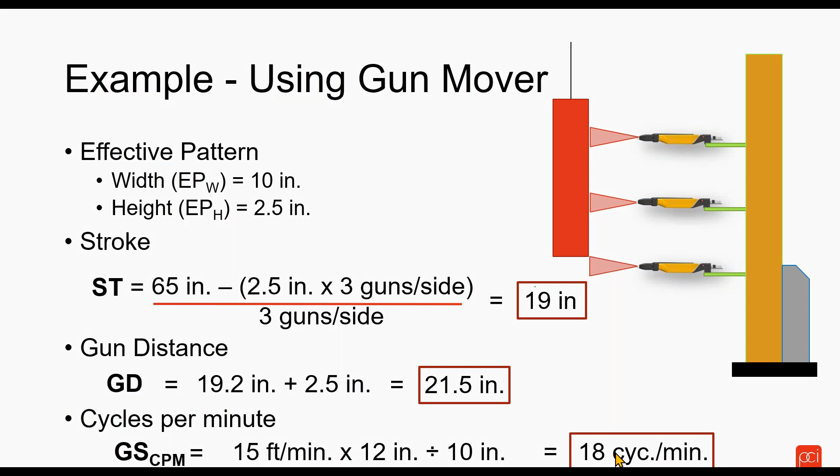As I mentioned, we want to make sure we understand what's the total stroke travel. We're going to do a little bit of a speed check here. Our total stroke is 2 times the stroke. Our gun mover speed, we already established, was 18 cycles per minute.

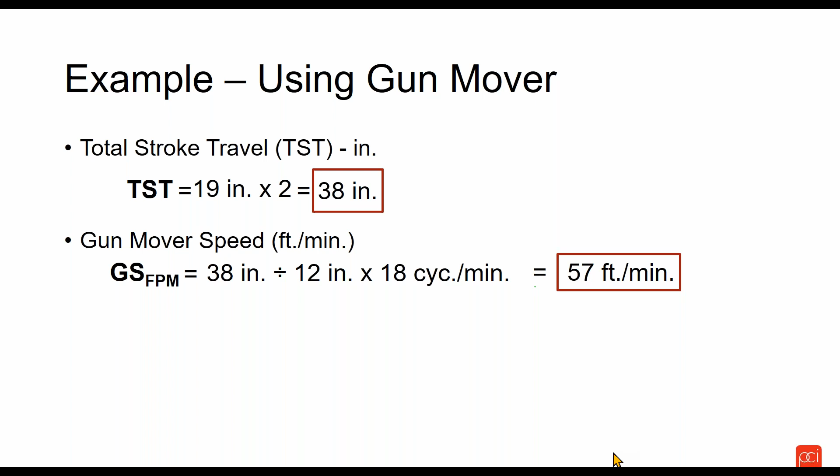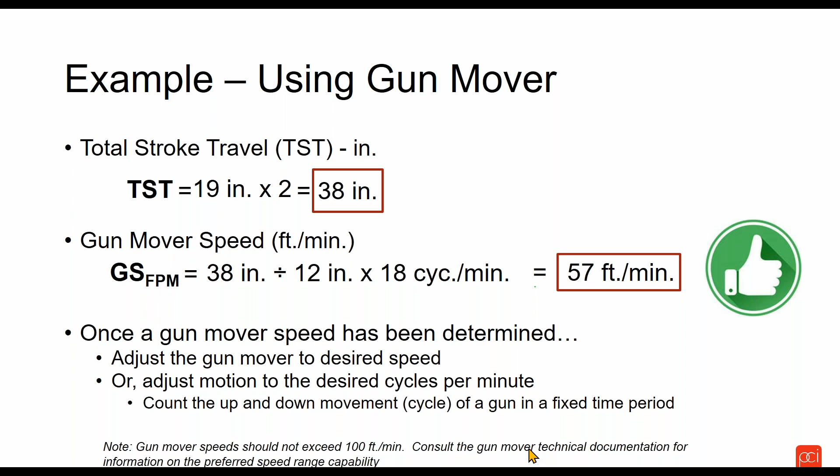So in this case, we're putting it through our gun speed feet per minute formula, and we can see that 57 feet per minute is well within the speed parameters we're looking for, below 100 feet per minute. Ideally, we would take this and begin to adjust the gun mover at this point, both in the speed or cycles, depending on how your machine is set up, and then you can also adjust the guns in the spacing that's determined.

So let's just take a brief look at an analysis of our application. We walked through a lot of formulas in a very short period of time, so let's just go back and do a double check here.

Based on the coverage capability, we determined that 6 guns was all that we needed to spray enough powder to cover the production rate passing in front of the guns at 15 feet a minute. 6 guns, 3 per side, could spray enough powder to give us the mil thickness we wanted at the assumed efficiency.

Then we went through and looked at an analysis based on fixed guns. So if we wanted to coat this utilizing fixed guns, we determined that we really needed more applicators to be able to cover the product entirely. In this case, we determined that 6 guns was needed to go up to 16 guns, or 8 per side.

And then we also did another analysis utilizing gun movers, where we determined that with the 6 guns, we were operating within the speed parameters and the stroke parameters of our machine, where it looks like utilizing a gun mover would be an effective application.

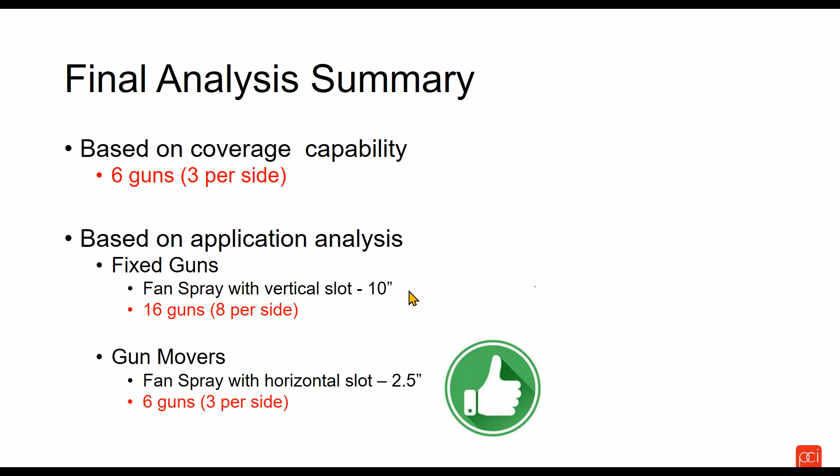So in bringing this thing home to a close, how many automatic guns are needed to really be able to coat the part?

Well, you need to be able to consider a number of different things: total production, the coating requirements, what's required from a coverage standpoint, part configuration, and all of that data. Once you know that data, you can calculate what's required to determine the number of guns, and then configure and adjust as needed.

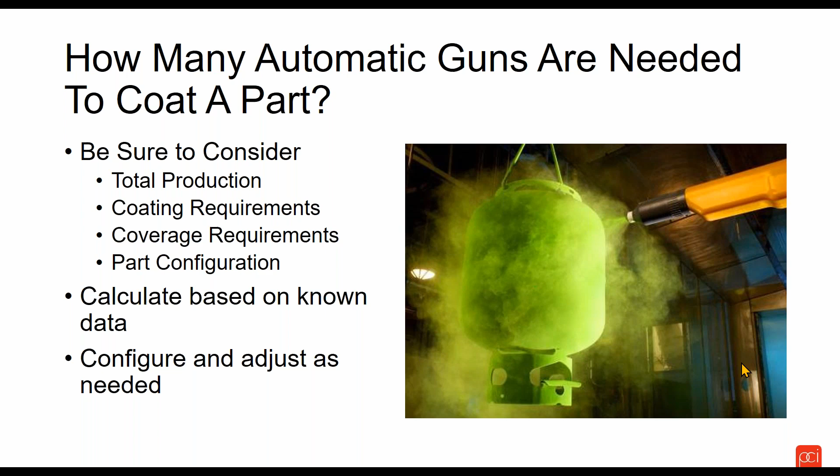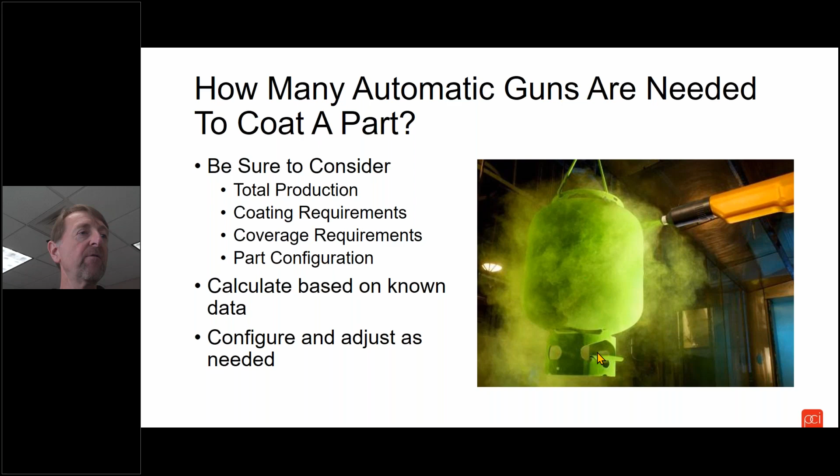If I may, I'll turn my camera back on here, just as a quick reference. If you're looking for more information on how to calculate, I would recommend, as I've done throughout the presentation, the handbook as a good, useful reference tool. It walks through these same formulas and helps you understand how to calculate the number of guns.

That might be required for a production line application. If the book isn't the right tool for you, I'd recommend attending the Powder Coating 202 workshop, Powder Coating Done Right, the advanced class. As part of that curriculum, there's a day and a half, and on the second day, as part of the lab activity, your team is responsible for evaluating how to coat an application. You walk through the formulas, and a simplified quick review of the presentation is done in that workshop. So that's another resource for those who like learning more hands-on.

With that, I'll turn it over to Kevin if there's no other questions.